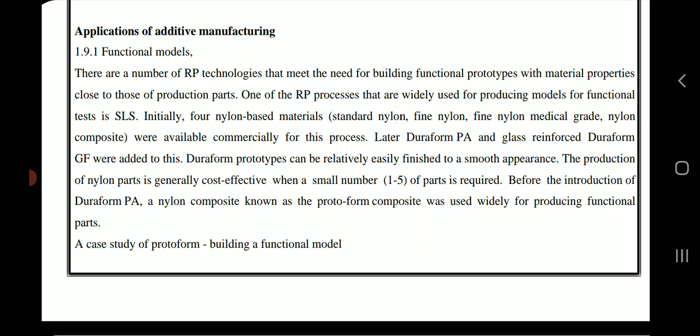ProtoForm is a blend of 50% by weight nylon powder and 50% by weight spherical glass beads. This SLS glass-filled nylon is processed to near full density, and has a high modulus and good heat and chemical resistance. The housing in the figure is a test part and is built in ProtoForm composite because it is required to withstand harsh testing conditions, including temperatures of about 100 degrees Celsius.

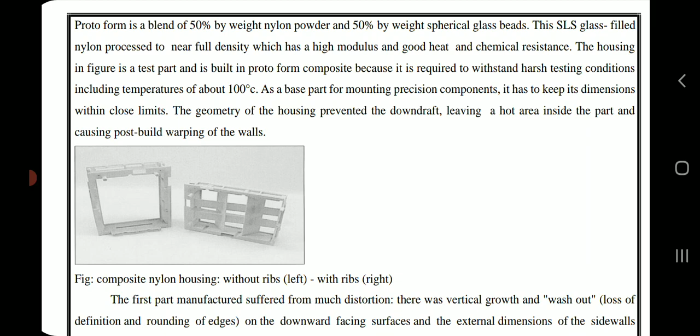As a base part for mounting precision components, it has to keep its dimensions within close limits. The geometry of the housing prevented the downdraft, leaving a hot area inside the part and causing post-build warping of the walls. The first part manufactured suffered from much distortion. There was vertical growth and washout, loss of definition and rounding of edges on the downward-facing surfaces, and the external dimensions of the side walls varied.

This problem was solved by making the wall thickness uniform and reducing its dimension. Non-functional ribs were added across the housing to stiffen it. Two ribs were positioned vertically and two others horizontally as shown in the figure. The number and size of the ribs were determined from experience to constrain post-process distortion in the x and y directions without adding too much build time. The ribs were also located so that they could easily be removed by machining after completing the build.

Subsequently manufactured parts had much better dimensional accuracy. The main functional dimensions were measured, but no form or geometry accuracy measurements were taken to evaluate the influence of the ribs. The accuracy in the build direction, z direction, and the xy plane was studied. The results showed that the ribs improved the accuracy consistently but had different effects in each direction. Also, there was reduced post-process distortion due to the added ribs.

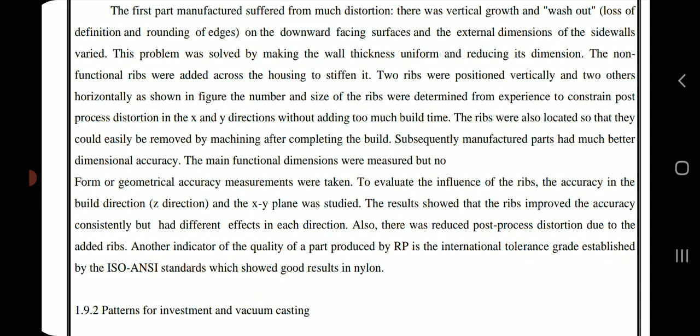Another indicator of the quality of a part produced by rapid prototyping is the international tolerance grade established by the ISO/ANSI standards, which showed good results in nylon.

Patterns for investment and vacuum casting. Rapid prototyping technologies are widely used for building patterns for investment and vacuum casting. For example, models built employing SLA, SLS, and FDM can be used as patterns for both casting processes. A case study is presented below that discusses some accuracy aspects of producing SLS patterns and also addresses general issues regarding the technological capabilities of the process.

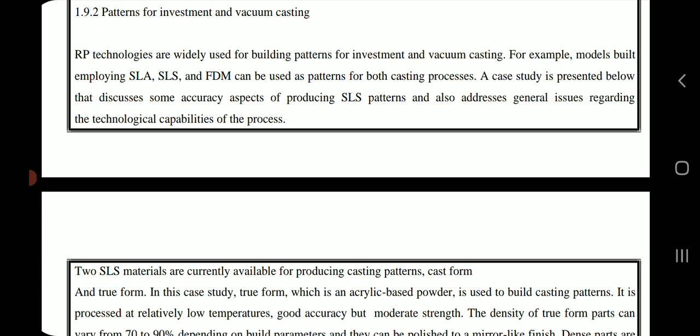Two SLS materials are currently available for producing casting patterns: CastForm and TrueForm. In this case study, TrueForm, which is an acrylic-based powder, is used to build casting patterns. It is processed at relatively low temperatures, with good accuracy but moderate strength. The density of TrueForm parts can vary from 70 to 90% depending on build parameters, and they can be polished to a mirror-like finish.

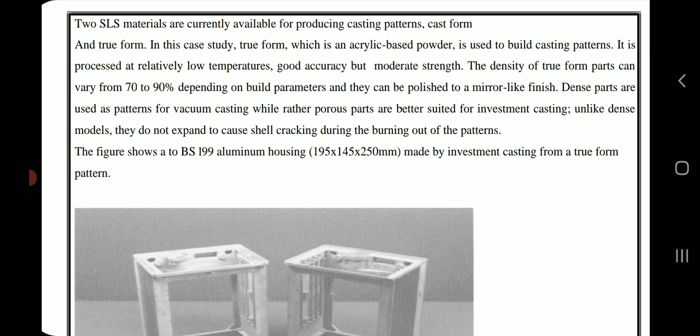Dense parts are used as patterns for vacuum casting, while rather porous parts are better suited for investment casting. Unlike dense models, they do not expand to cause shell cracking during the burning out of the patterns. The figure shows a BS-199 aluminum housing made by investment casting from a TrueForm pattern.

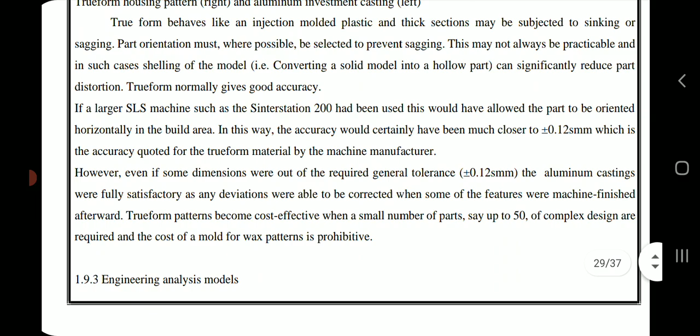TrueForm behaves like an injection molded plastic, and thick sections may be subject to sinking or sagging. Part orientation must, where possible, be selected to prevent sagging. This may not always be practicable, and in such cases, shelling of the model, that is, converting a solid model into a hollow part, can significantly reduce part distortion.

TrueForm normally gives good accuracy. If a larger SLS machine, such as the Sinterstation 2000, had been used, this would have allowed the part to be oriented horizontally in the build area. In this way, the accuracy would certainly have been much closer to plus or minus 0.12 mm, which is the accuracy quoted for the TrueForm material by the machine manufacturer.

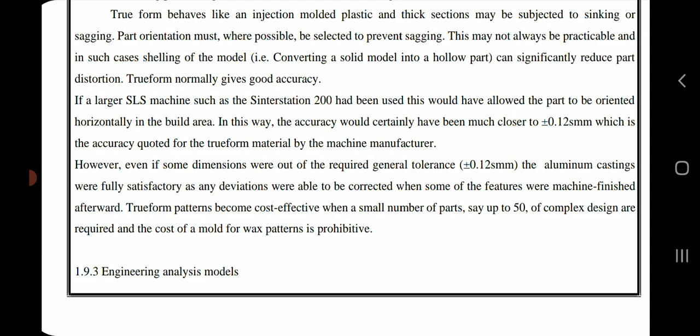However, even if some dimensions were out of the required general tolerance, the aluminum castings were fully satisfactory, as any deviations were able to be corrected when some of the features were machine finished. TrueForm patterns become cost effective when a small number of parts, say up to 50 of complex design, are required, and the cost of a mold for wax patterns is prohibitive.

Engineering analysis models. Computer aided engineering (CAE) analysis is an integral part of time compression technologies. Various software tools exist, mainly based on finite element analysis, to speed up the development of new products by initiating design optimization before physical prototypes are available. However, the creation of accurate FEA models for complex engineering objects sometimes requires significant amounts of time and effort. By employing RP techniques, it is possible to begin test programs on physical models much earlier and complement the CAE data. Two applications of RP models for engineering analysis are described below.

Visualization of flow patterns. For example, SLA models were used to optimize the cross-flow jacket of a V6 high-performance racing engine. 60 sensors were installed in the model to monitor local flow temperature and pressure conditions. The coolant flow patterns were visualized by accurately injecting very small air bubbles. The flow patterns were recorded by high-speed video. The analysis conducted provided valuable data about stagnation zones and inefficiently cooled sections.

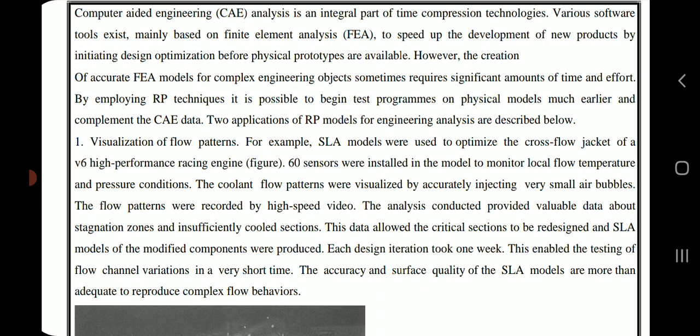This data allowed the critical sections to be redesigned, and SLA models of the modified components were produced. Each design iteration took 1 week. This enabled the testing of flow channel variations in a very short time. The accuracy and surface quality of the SLA models are more than adequate to reproduce complex flow behaviors.

Photoelastic stress analysis. Photoelastic testing can be used to determine the stresses and strains within physical parts under specific conditions. This analysis is based on the temporary birefringence of a transparent material subjected to a specific load. SLA models fabricated using the ACES build style exhibit the required birefringence that can be illustrated by irradiating the test samples with polarized white and monochromatic light.

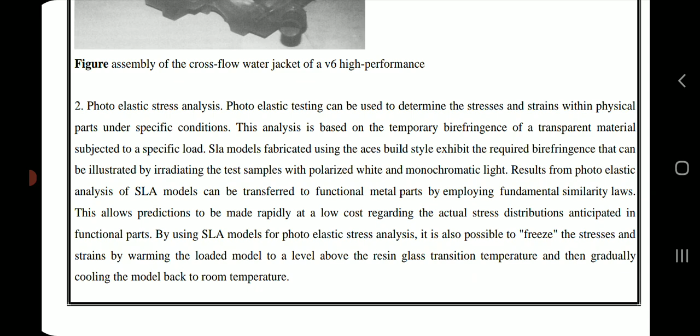Results from photoelastic analysis of SLA models can be transferred to functional metal parts by employing fundamental similarity laws. This allows predictions to be made rapidly at a low cost regarding the actual stress distributions anticipated in functional parts. By using SLA models for photoelastic stress analysis, it is also possible to freeze the stresses and strains by warming the loaded model to a level above the resin glass transition temperature and then gradually cooling the model back to room temperature.

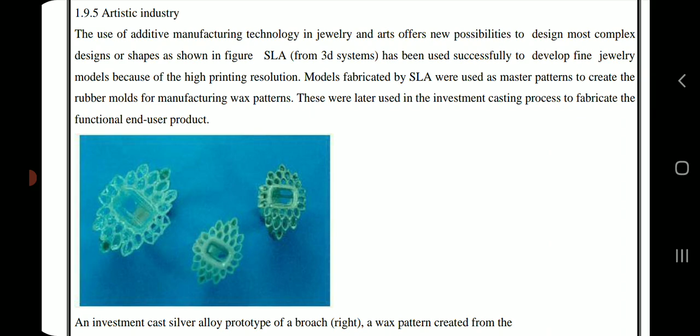Artistic industry. The use of additive manufacturing technology in jewelry and arts offers new possibilities to design most complex designs or shapes, as shown in the figure. SLA from 3D Systems has been used successfully to develop fine jewelry models because of the high printing resolution. Models fabricated by SLA were used as master patterns to create the rubber molds for manufacturing wax patterns. These were later used in an investment casting process to fabricate the functional end user product.

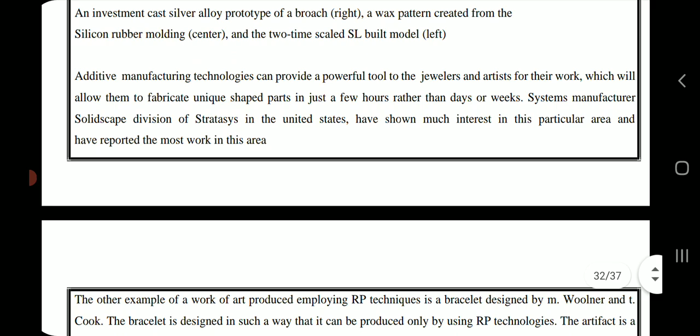Additive manufacturing technologies can provide a powerful tool to jewelers and artists for their work, which will allow them to fabricate unique shaped parts in just a few hours rather than days or weeks. Systems manufacturer Solidscape division of Stratasys in the United States have shown much interest in this particular area and have reported the most work in this area.

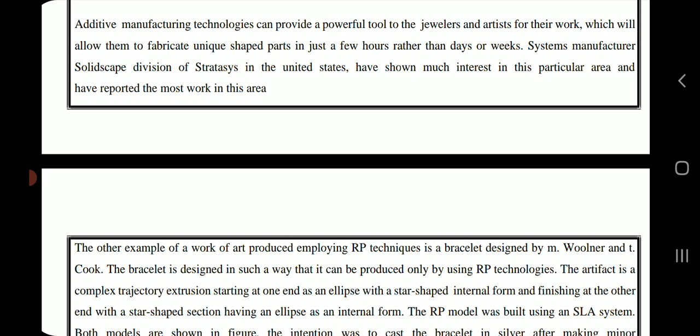The other example of a work of art produced employing rapid prototyping techniques is a bracelet designed by M. Woolner and T. Cook. The bracelet is designed in such a way that it can be produced only by using RP technologies. The artifact is a complex trajectory extrusion starting at one end as an ellipse with a star-shaped internal form and finishing at the other end with a star-shaped section having an ellipse as an internal form.

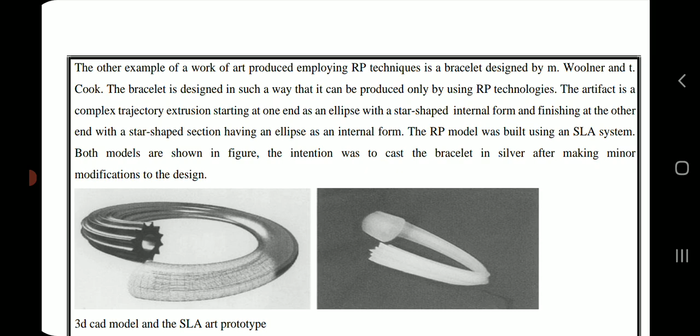The RP model was built using an SLA system. Both models are shown in the figure. The intention was to cast the bracelet in silver after making minor modifications to the design. Medical industry.

RP technologies are applied in the medical domain for building models that provide visual and tactile information. In particular, RP models can be employed in the following medical applications: operation planning using real-size RP models of patients' pathologic regions. Surgeons can much more easily understand physical problems and gain a better insight into the operations to be performed. RP models can also assist surgeons in communicating the proposed surgical procedures to the patients.

Surgery rehearsal. RP models offer unique opportunities for surgeons and surgical teams to rehearse complex operations using the same techniques and tools as during actual surgery. Potentially, such rehearsals can lead to changes in surgical procedures and significantly reduce risk. Training. RP models of specimens of unusual medical deformities can be built to facilitate the training of student surgeons and radiologists. Such models can also be employed for student examination.

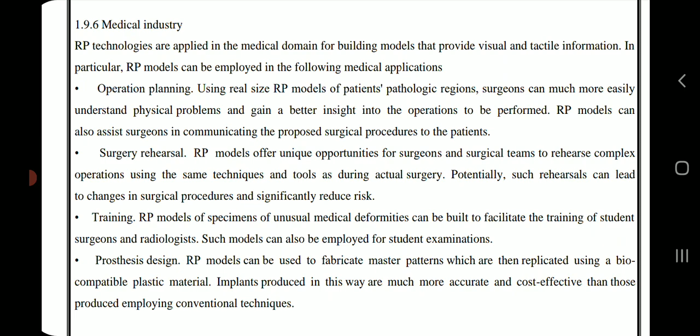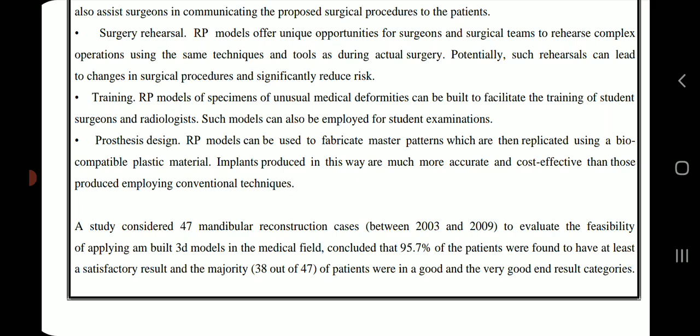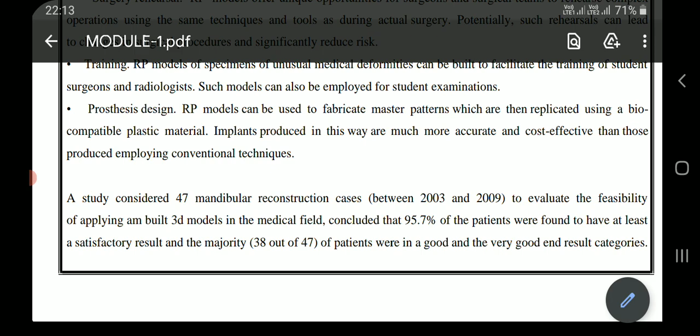Prosthesis design. RP models can be used to fabricate master patterns which are then replicated using a biocompatible plastic material. Implants produced in this way are much more accurate and cost effective than those produced employing conventional techniques. A study that considered 47 mandibular reconstruction cases between 2003 and 2009 to evaluate the feasibility of applying built 3D models in the medical field concluded that 95.7% of the patients were found to have at least a satisfactory result, and the majority, 38 of 47 patients, were in the good and very good result categories.

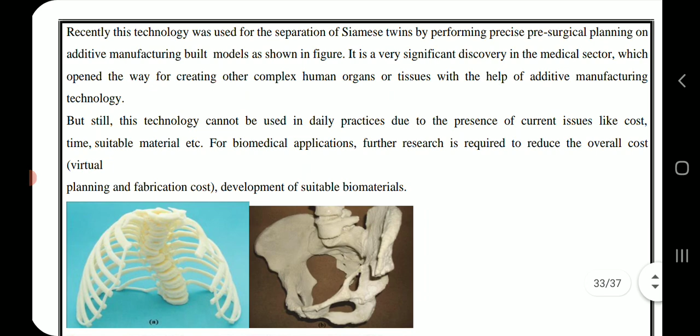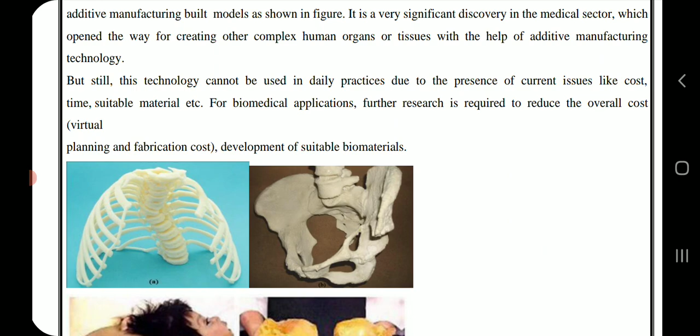Recently, this technology was used for the separation of Siamese twins by performing precise pre-surgical planning on additive manufacturing built models, as shown in the figure. It is a very significant discovery in the medical sector which opened the way for creating other complex human organs or tissues with the help of additive manufacturing technology. But still, this technology cannot be used in daily practice due to current issues like cost, time, suitable material, etc. For biomedical applications, further research is required to reduce the overall cost, virtual planning and fabrication cost, and for the development of suitable biomaterials.

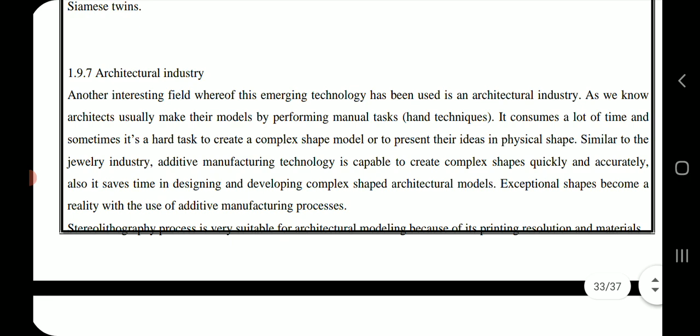Architectural industry. Another interesting field where this emerging technology has been used is the architectural industry. As we know, architects usually make their models by performing manual tasks and hand techniques. It consumes a lot of time, and sometimes it's a hard task to create a complex shape model or to present their ideas in physical shape. Similar to the jewelry industry, additive manufacturing technology is capable of creating complex shapes quickly and accurately. Also, it saves time in designing and developing complex shaped architectural models.

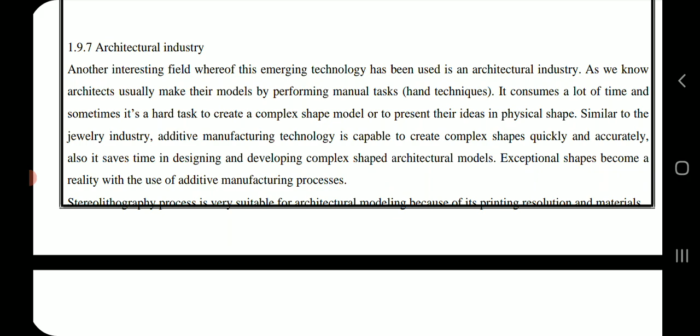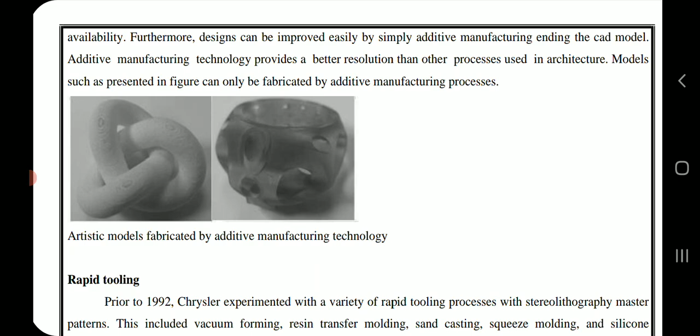Exceptional shapes become a reality with the use of additive manufacturing processes. The stereolithographic process is very suitable for architectural modeling because of its printing resolution and materials availability. Furthermore, designs can be improved easily by simply amending the CAD model. Additive manufacturing technology provides a better resolution than other processes used in architecture. Models such as presented in the figure can only be fabricated by additive manufacturing processes.

Rapid tooling. Prior to 1992, Chrysler experimented with a variety of rapid tooling processes with stereolithographic master patterns. These included vacuum forming, resin transfer molding, sand casting, squeeze molding, and silicone molding. Here we realize how early in the additive manufacturing field's development these applications were investigated. An area of significant effort in both the aerospace and automotive industries was the use of stereolithography parts as investment casting patterns. Early experiments used thin-walled SL patterns or hollow parts because SL resins expand more than investment casting wax when used as patterns. The SL part tended to expand and crack the ceramic shell.

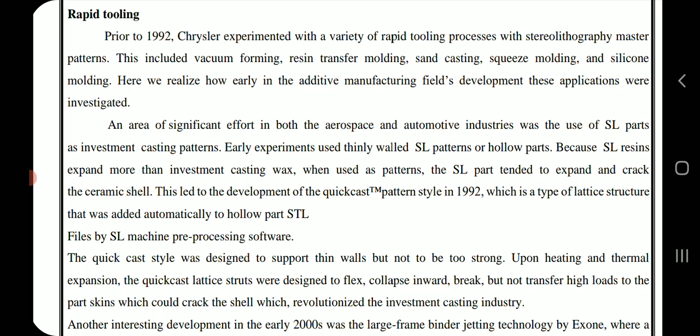This led to the development of the QuickCast pattern style in 1992, which is a type of lattice structure that was added automatically to hollow part STL files by SL machine pre-processing software. The QuickCast style was designed to support thin walls but not to be too strong. Upon heating and thermal expansion, the QuickCast lattice struts were designed to flex, collapse inward, or break, but not transfer high loads to the part skins, which could crack the shell. This revolutionized the investment casting industry.

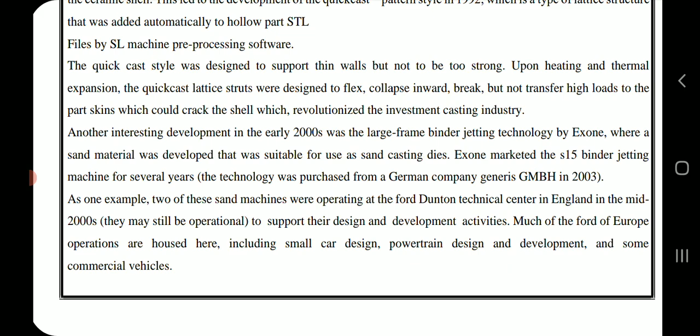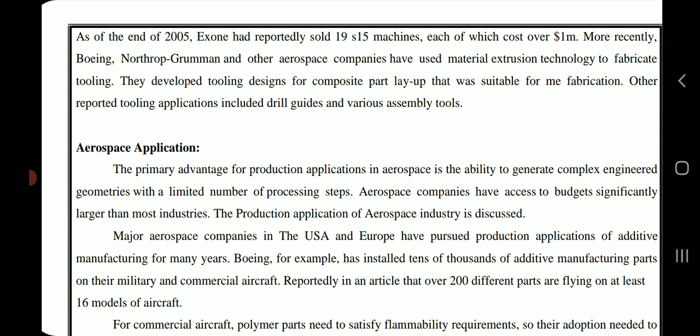Another interesting development in the early 2000s was the large frame binder jetting technology by ExOne, where a sand material was developed that was suitable for use as sand casting dies. ExOne marketed the S15 binder jetting machine for several years. The technology was purchased from a German company, Generis GmbH, in 2003. As one example, two of these sand machines were operating at the Ford Dunton Technical Center in England in the mid 2000s. They may still be operational to support their design and development activities. Much of the Ford of Europe operations are housed here, including small car design, powertrain design and development, and some commercial vehicles. As of the end of 2005, ExOne had reportedly sold 19 S15 machines, each of which cost over $1 million.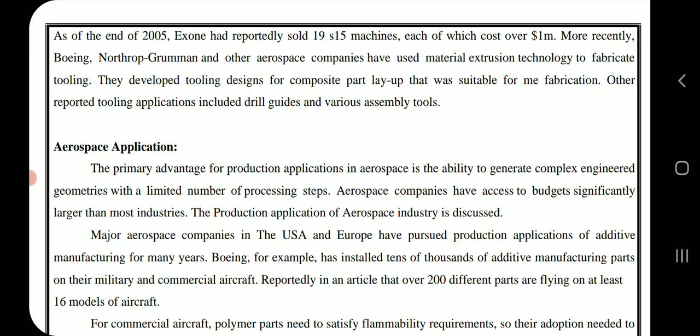More recently, Boeing, Northrop Grumman, and other aerospace companies have used material extrusion technology to fabricate tooling. They developed tooling designs for composite part layup that were suitable for ME fabrication. Other reported tooling applications include drill guides and various assembly tools.

Aerospace applications. The primary advantage for production applications in aerospace is the ability to generate complex engineered geometries with a limited number of processing steps. Aerospace companies have access to budgets significantly larger than most industries. The production application of the aerospace industry is discussed. Major aerospace companies in the USA and Europe have pursued production applications of additive manufacturing for many years.

Boeing, for example, has installed tens of thousands of additive manufacturing parts on their military and commercial aircraft. Reportedly, over 200 different parts are flying on at least 16 models of aircraft. For commercial aircraft, polymer parts need to satisfy flammability requirements, so their adoption needed to wait until flame retardant polymer materials were developed. For metals, material qualification and part certification took many years to achieve.

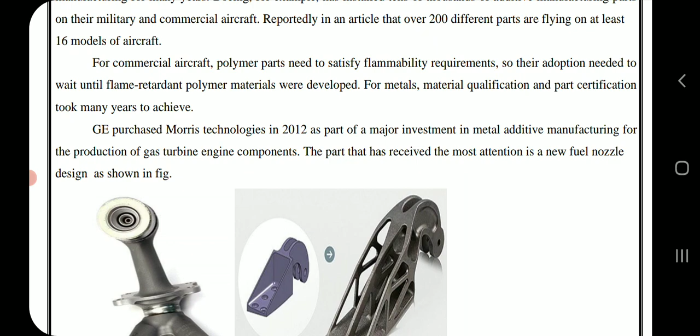GE purchased Morris Technologies in 2012 as part of a major investment in metal additive manufacturing for the production of gas turbine engine components. The part that has received the most attention is a new fuel nozzle design shown in the figure. The new nozzle concept reportedly combined 18 to 20 parts into one integrated design, avoiding many brazed joints and assembly operations, and achieved 25% weight reduction and additional cost savings.

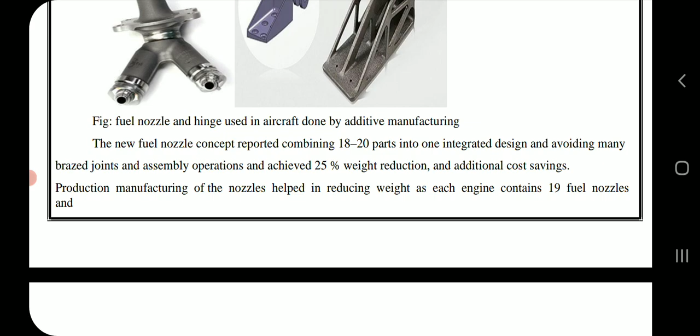Production manufacturing of the nozzles helped in reducing weight, as each engine contains 19 fuel nozzles and more than 4,500 engines have been sold to date, so production volume could exceed 100,000 total parts by 2020. This is claimed to save 1,000 pounds of weight out of each engine.

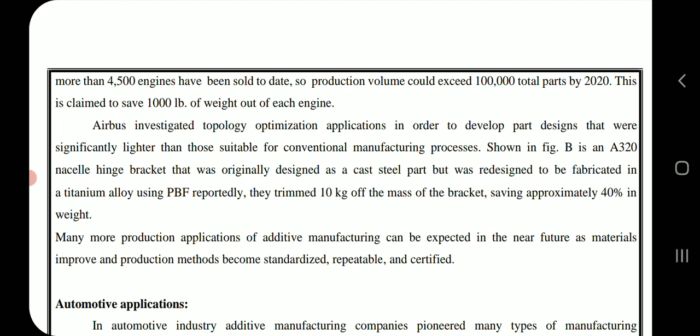Airbus investigated topology optimization applications in order to develop part designs that were significantly lighter than those suitable for conventional manufacturing processes. Shown in the figure is an A320 nacelle hinge bracket that was originally designed as a cast steel part but was redesigned to be fabricated in a titanium alloy using PBF. Reportedly, they trimmed 10 kg off the mass of the bracket, saving approximately 40% in weight. Many more production applications of additive manufacturing can be expected in the near future as materials improve and production methods become standardized, repeatable, and certified.

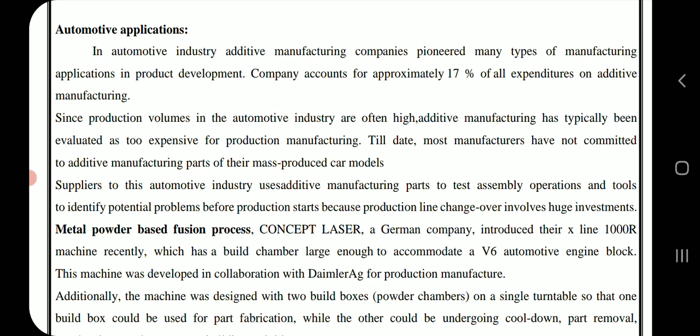Automotive applications. In the automotive industry, additive manufacturing companies pioneered many types of manufacturing applications in product development. The industry accounts for approximately 17% of all expenditures on additive manufacturing. Since production volumes in the automotive industry are often high, additive manufacturing has typically been evaluated as too expensive for production manufacturing. To date, most manufacturers have not committed to additive manufacturing parts on their mass produced car models. Suppliers to the automotive industry use additive manufacturing parts to test assembly operations and tools to identify potential problems before production, because production line changeover involves huge investments.

Metal powder bed fusion process. Concept Laser, a German company, introduced their X-Line 1000R machine recently, which has a build chamber large enough to accommodate a V6 automotive engine block. This machine was developed in collaboration with Daimler for production manufacture. Additionally, the machine was designed with two build boxes on a single turntable so that one build box could be used for part fabrication while the other could be undergoing cool down, part removal, preheating, or other non-part building activities. For specialty cars or low volume production, additive manufacturing can be economical for some parts. Applications include custom parts on luxury cars or replacement parts on antique cars.

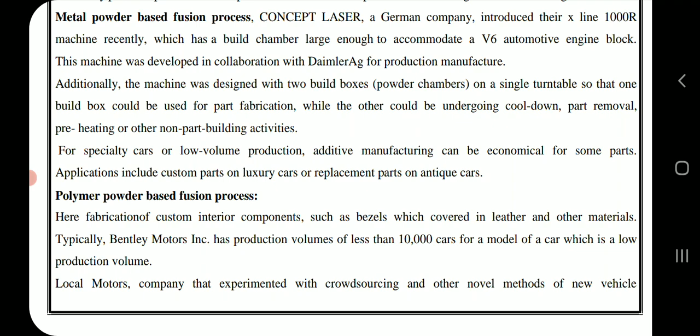Polymer powder bed fusion process. Here, fabrication of custom interior components such as bezels, which are covered in leather and other materials; typically Bentley Motors has production volumes of less than 10,000 cars for a model, which is a low production volume. Local Motors, a company that had experimented with crowdsourcing and other novel methods of new vehicle development, participated in a DARPA military vehicle development exercise and utilized additive manufacturing for their applications. They planned to fabricate the body and structural components using a new large frame material extrusion machine from Oak Ridge National Laboratory.

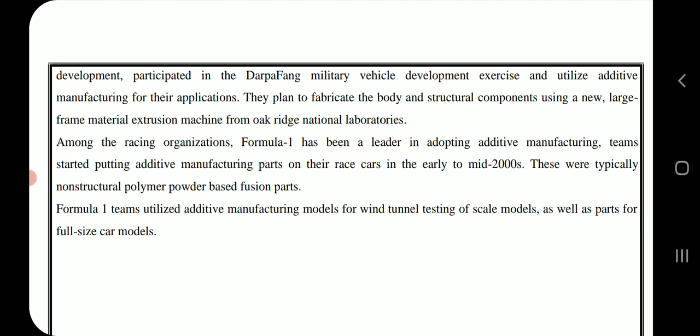Among the racing organizations, Formula One has been a leader in adopting additive manufacturing. Teams started putting additive manufacturing parts on their race cars in the early to mid 2000s. These were typically non-structural polymer powder bed fusion parts. Formula One teams utilized additive manufacturing models for wind tunnel testing of scale models as well as parts for full size car models.